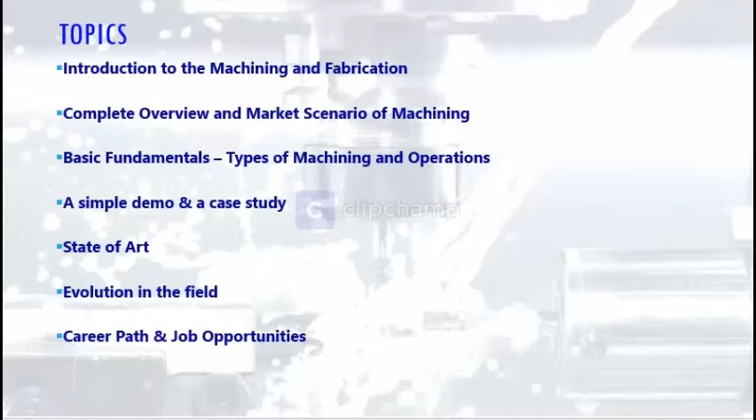This is very useful for everyone, including freshers who have just graduated from college and are willing to pursue a career. Machining would be a fantastic option because it has various roles, such as supply chain, CNC programmer, production, quality engineer, and more. So machining itself is a big opportunity, and it can also be useful for those willing to have a career change, because it's easy to learn, though it needs a skill that's time tested. So for someone willing to change careers and looking into new avenues, machining would be another option.

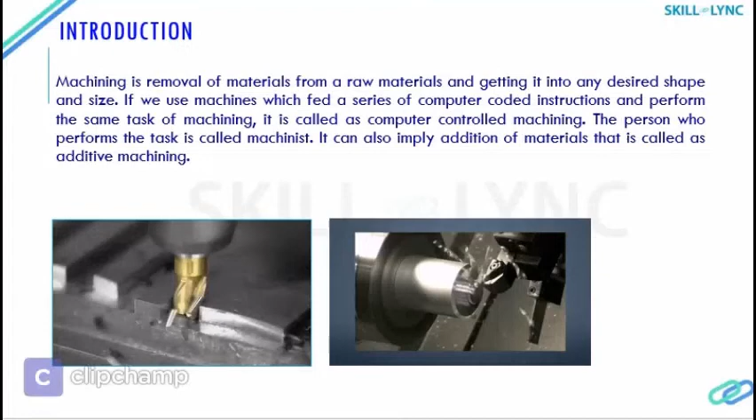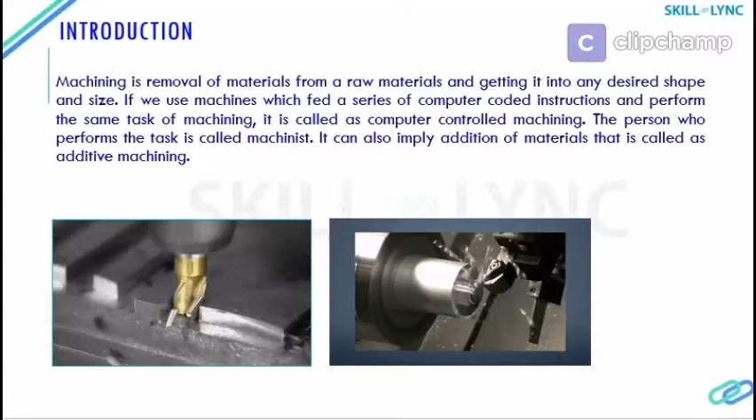And then some people who are industrialists or entrepreneurs can also think about it, because this can be a good startup for them, where they can start with 5 or 6 machines and grow it to the limit they want, like 1000 or 1500. The more machines they implement, the more jobs they can get, and then they can get more revenue out of it. So machining is a term commonly used in manufacturing and industry applications.

But exactly what does the acronym CNC stand for? Do you know? CNC is Computer Numerical Control machine. In the early days, machining started with punching cards to give commands, and now it has changed to various forms, like designing the CAD model, converting the CAD model into a CNC program, and preparing the CNC machine before executing the machining operation.

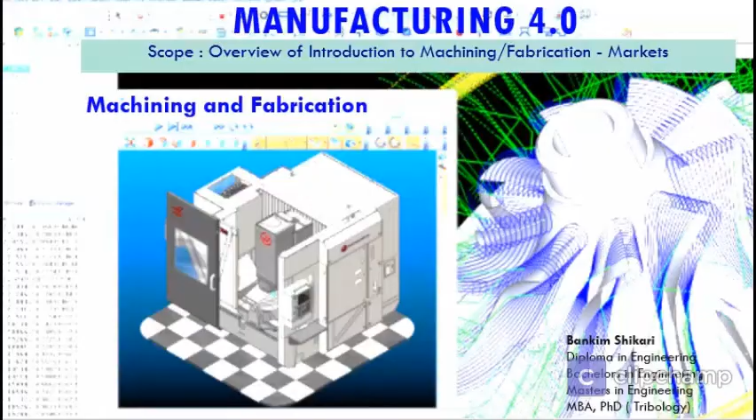So the machining operation looks like a simple thing, but skill is needed when there's a change in the program because of tooling wear and tear, since over time there is always some play and change in tooling behavior. With that, the skilled person needs to understand how much to adjust the machining program so that he can get the nominal value of the product within the tolerance limit.

So it depends on which area to choose and which machining center you wish to open or want to work for. If you use machines which are fed a series of computer coded instructions and perform the same task of machining, it's called CNC machining - computer numerical controlled, or computer controlled machining. The person who performs the task is called a machinist.

It can also imply addition of material, which is called additive machining. If some part is damaged in the industry, like when using some molding tool, and you find that the tool has been used or worn off and is no longer useful, or the tolerances go wide, you can add some additives with the laser and then do the machining again to bring it back to shape. This way, repair and maintenance also takes place in machining.

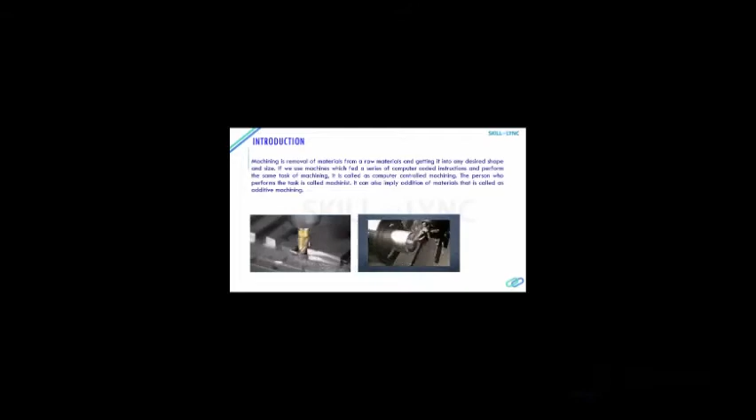So I've given you a little bit of visualization so you can understand that. I think mechanical engineers already did some processing with their lathe machining when using it. But nowadays it's no longer the basic lathes that are used in the industry - all are using CNC lathe machines.

But anyway, before you learn the high level programming, you have to learn the basics, like C or Fortran - similar to how we learn the basics in industry, colleges or university. Then it comes to real machining, where you have to understand in depth machining cut, feed, material type, temperature, pressure, or coolant heat temperature. So those kinds of things come into the picture.

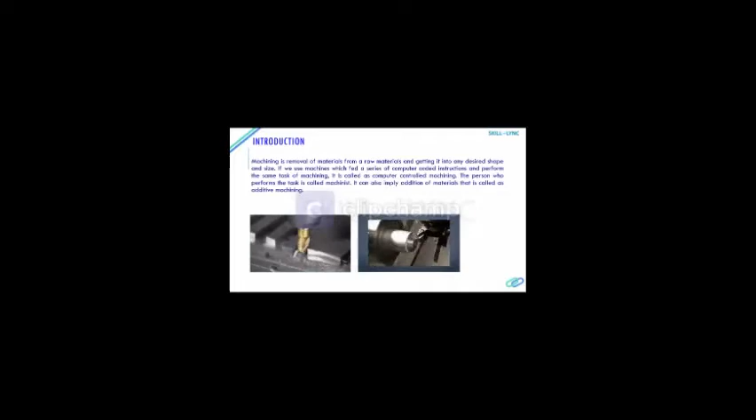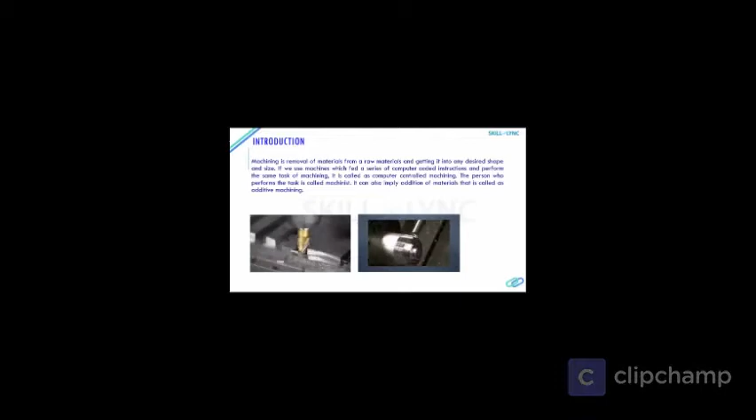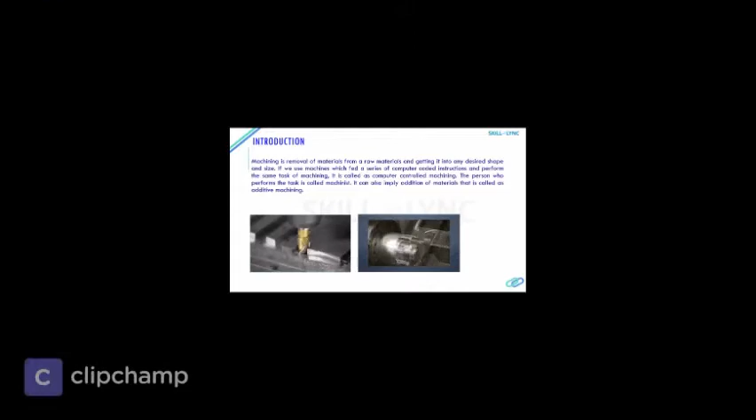So if you see here, there's milling on the left hand side - the tool is cutting a groove inside. On the right hand side there's a lathe machine which is used with a combination of tools - one is turning and another one is making slots onto it.

As I said, this is a very big industry. I'm just talking about figures given by government organization statistics. The overall CNC machining market is expected to reach 100 billion by 2025 - it's about 90 something like that right now. The statistic says 7% growth has been observed from 2019 till now.

And this is the biggest outsourcing job going on nowadays with China, and that's what makes it very difficult for any industry, including the US, to pull out their basic fabrication, because it needs a lot of investment - machines, tools, and the skill set gained over the years. So these are the reasons it's very difficult for people to quickly change their manufacturability from one nation to another. It's strategic, and needs time and time-tested growth, and a bit of investment as well, and of course the skill set behind it.

The overall CNC machining market is expected to reach 100 billion, growing at 7% every year. This is one of the biggest strengths of outsourcing jobs delegated to Asian markets like China, Malaysia, and Thailand, which are all leading in this area.

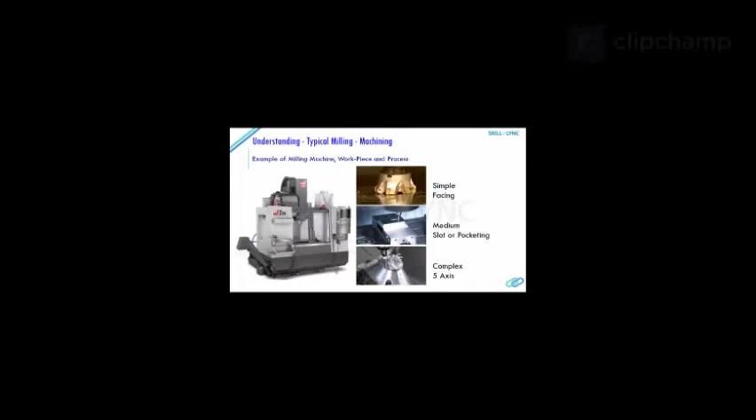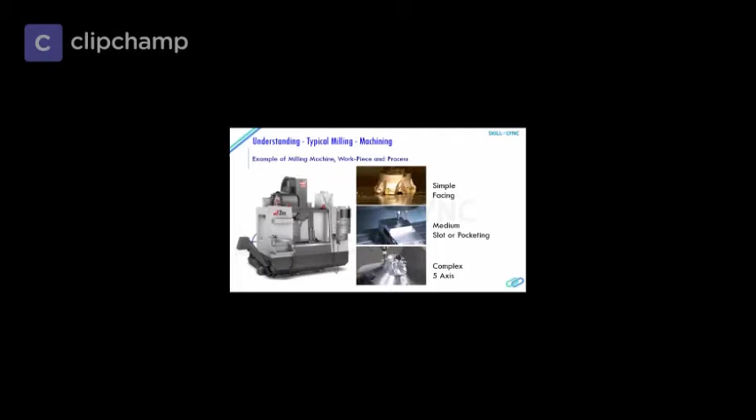Now where the skill comes in is this: because your tool and your machine have play, after some time your tool and machine wear out or have some changes. So with the changing tool, or at certain times during the process, you need to come back and check if there are differences in the part, especially when the parts need to be very precise.

Because if you run it, it might make maybe 500 or 600 pieces fine, but after that you have to come back, because if you don't, the parts may already be damaged, maybe 200 pieces. So you need to keep monitoring that. That's where the skill counts - knowing what needs to be adjusted, and based on the time frame, when you have to replace the tool to minimize scrap and wastage of material.

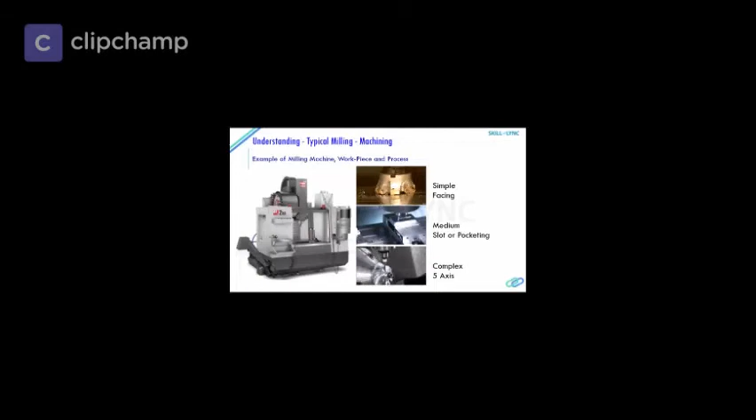So if you see, there's 5-axis complex machining. In this machining, if you see, one axis is the tool cutting up at an angle, another one is the tool itself moving out making a different groove, and the groove is angular as well as doing some facing in it.

5 different axes are used in this one. If you clearly see: 1, 2, 3, 4, 5. So this is how your 5-axis complexity parts are done, and depending on the machining requirement, we go with this.

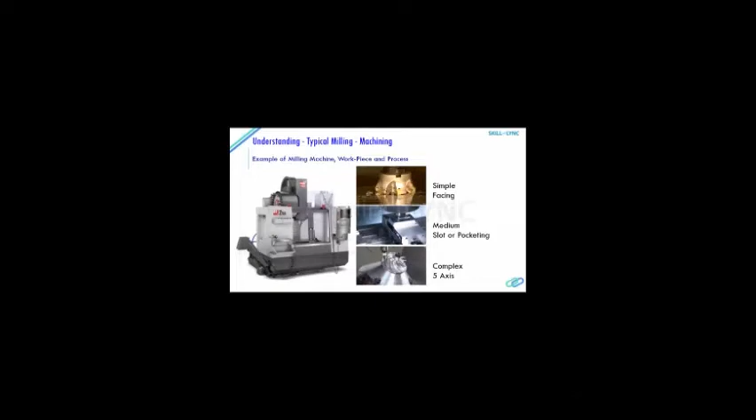So overall, if you see the types of operations we can use - we've already discussed a bit like milling, facing, as you saw in the previous slide. There's also peripheral milling, which is done on the side of the part. The part already comes as a solid material, which is already machined inside, but outside you have to do it. And there's facing operation in milling, pocketing, creating grooves and shells inside the material.

And then there's the turning operation. Turning is done in the lathe, you can use turning, or also in the milling you can do turning, but lathe would be better because, depending on the operation, you have to keep changing the process, thinking through the process.

For example, if you're making a part entirely in the milling machine, and it needs a turning operation, and you're doing it in the milling machine - what will happen is that the milling machine can do the turning, but then in turning, the tool has to go round the part, cutting through all the sides to do that.

What happens is the cycle time will be more. Those things you can do in a lathe machine in very low cycle time, so you can save the cycle time. Why I'm talking about cycle time is that cycle time is a cost, because the more you run the machine, the more it needs the time of the industry. It relates to the cost of electricity, running cost, lubrication, maintenance, and manpower, man hours, everything is included in that.

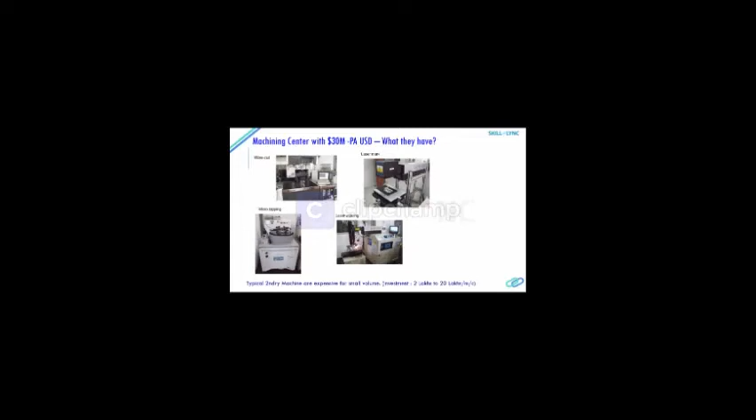Microlapping, or super drill, are very small, fine drills, about 1 to 5 microns, with a very high depth as well. This is used mostly in the medical industry, where you want to pass samples through a small capillary.

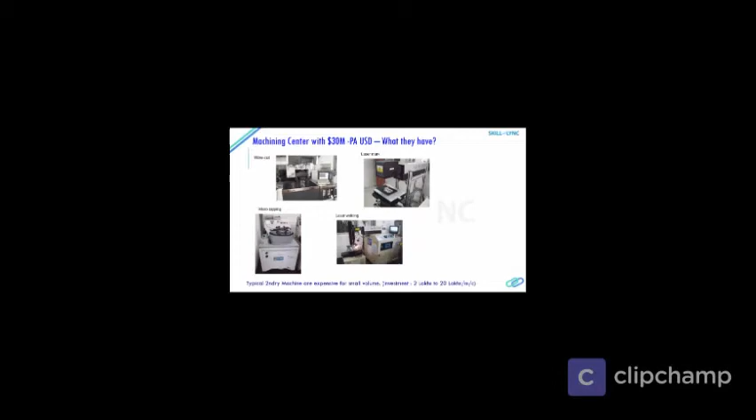Laser welding is also used for high volume of parts, where you want welding. It can also be done on small kinds of parts, where a few components can be welded and used in electronic industries.

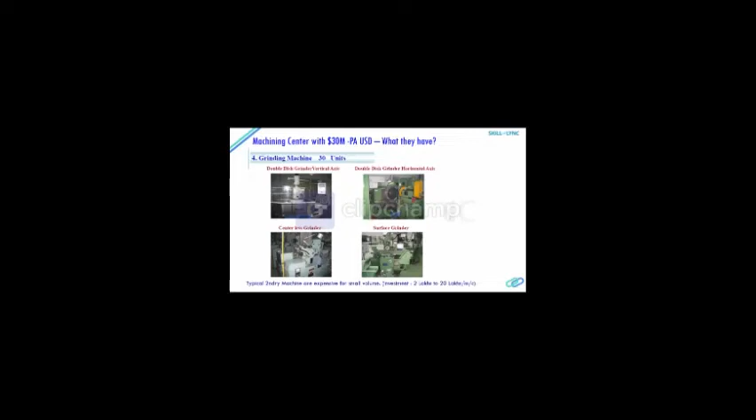Similar to the surface grinder, this one is very common. You can use it in CNC and non-CNC both. The investment amount ranges from 2 lakhs to 20 lakhs.

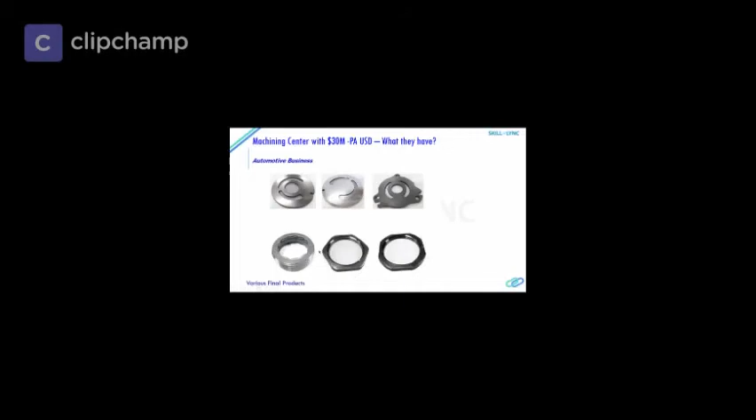Then there's the automotive business, related to the crankshaft, engine body, or two-stroke engines. These are engine cover parts, and they need threading operations. You can do casting, then threading, then barreling or tumbling, and then send it to them.

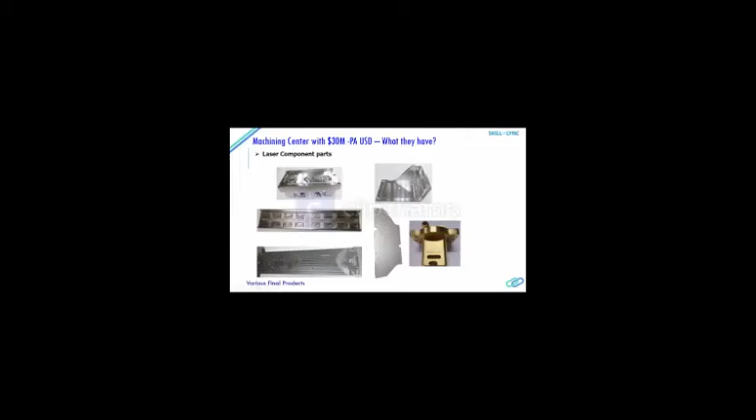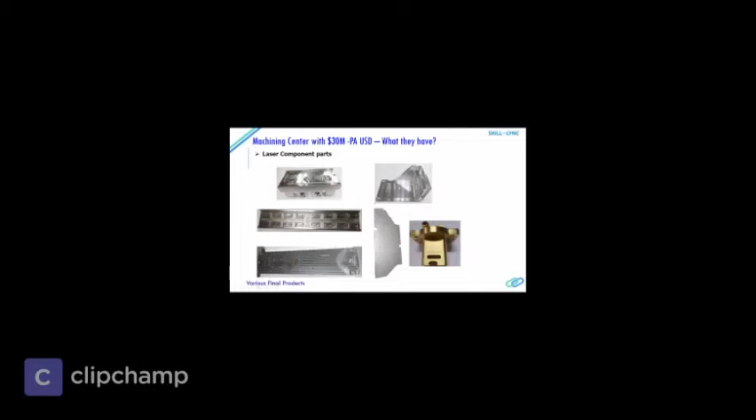Laser component parts are also there. You can use different laser components here, where you can machine the part with different axes, like 5-axis or 6-axis, and create different kinds of channels through it. These are some examples, and then you can assemble the part, get gold plating, and then send the part.

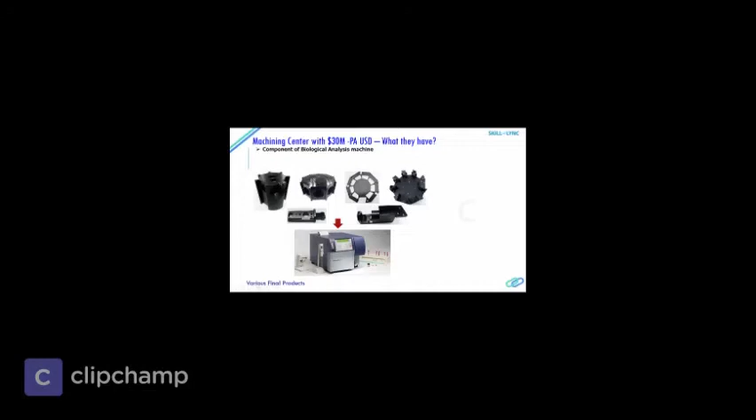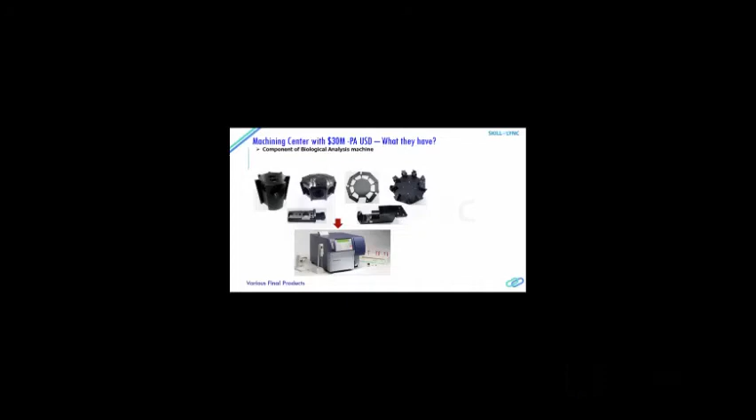Some of the parts used in these materials look black, but they're not metal - it's plastic, about 40% plastic and 60% glass in this one. These are highly precise parts. Sometimes you want to use parts that are very non-reactive - you don't want to use metals there because they may react with the material, so you want something strong but also non-reactive.

Automobile parts - you can see different areas. There are hundreds of automobile parts, like those for 2-tier or 3-tier vehicles. We can use any of them.

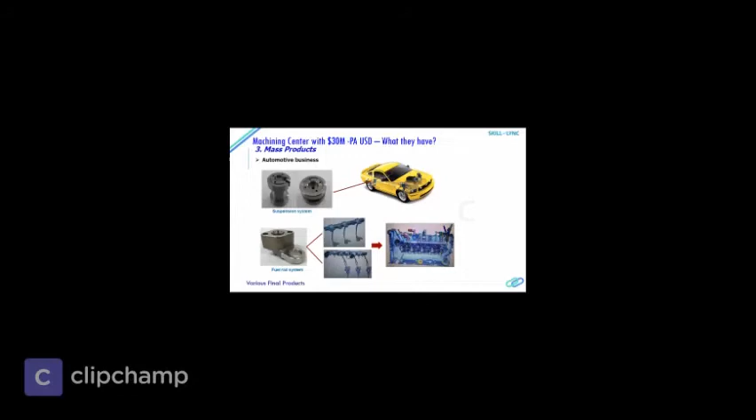Two tiers means you have a supplier like Toyota or Honda. They have a supplier, and those need certification like IATF 16949, but that needs heavy investment. So what we need is someone who can supply to us, because a supplier also needs a secondary supplier. Some suppliers do this: they have a machining industry but are unable to make it more cost effective, so they give it to the secondary supplier. That's called a second tier supplier. Toyota doesn't know the second tier supplier, but the first tier supplier does, and knows they can do it. But because of certification and other requirements, the second tier supplier can't go to Toyota directly and say they want to be their supplier. Toyota or Honda have their own audit requirements that are very complex and very high in standard.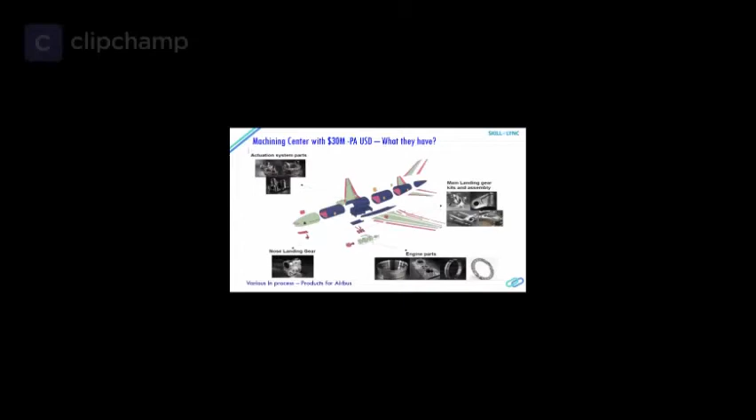Some automation systems and machining parts are in the aerospace and aviation sector. You can see them in nose landing gear, engine parts, main landing gear, kit assembly, actuation systems - machining parts are everywhere. These normally use cold forging, die casting, or aluminum extrusion as a pre-process.

Heat treatment includes hardening and tempering. Heat treatments are given to change the granular structure, give the required hardness to the part, relieve stress, or soften the part - annealing, case hardening, soft nitriding. These are all kinds of heat treatment in machining industries.

Surface treatments include iron plating, zinc plating, chrome plating, gold plating, silver plating, acid aging, hard anodizing, and clear or black anodizing. You see the kind of material that industries are using.

For example, aluminum is very soft and ductile, easy to machine, but steels are very hard and brittle. Some softer materials exist, but harder ones exist too. There are also ceramics - ceramic machining is one of them, very hard and needing a very strong tool. Then there's brass, copper, plastics.

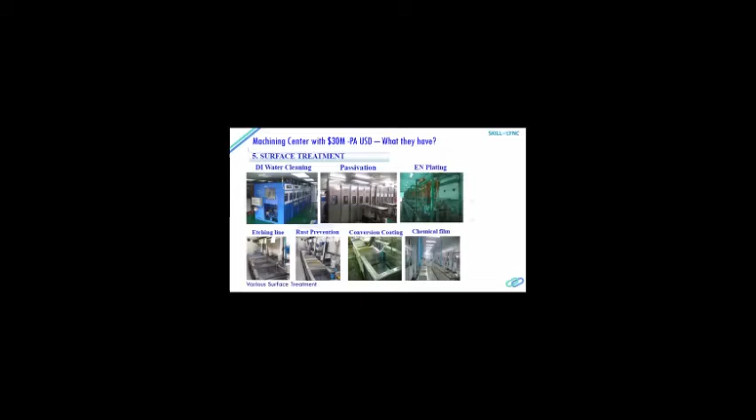Surface treatments such as DI water cleaning, passivation process, electro-nickel plating, etching line, rust prevention, conversion coating, chemical film - these are all kinds of surface treatment normally done with machining parts.

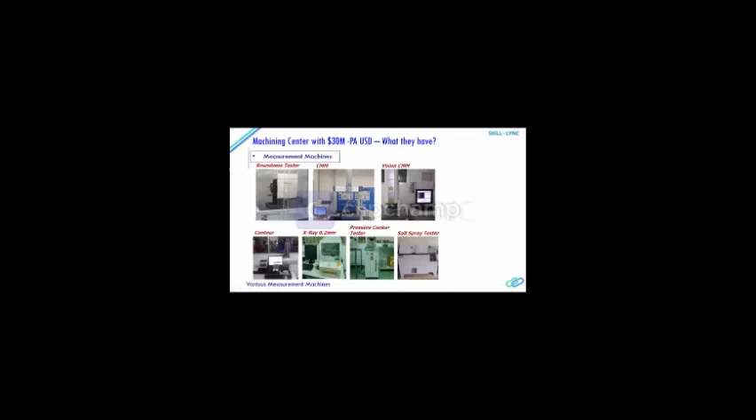I'm running out of time, so I'll do a real quick review. These are roundness tester, CMM, vision CMM, contour, X-ray, pressure cooker tester, salt spray tester - all used for measurement and testing of the part.

Inspection instruments like hardness tester, as I said, then spectrum analysis. You use the material, break it, then use a broad spectrum of light to determine the level of material particles inside or the material presence in that particular specimen. That's what it's called.

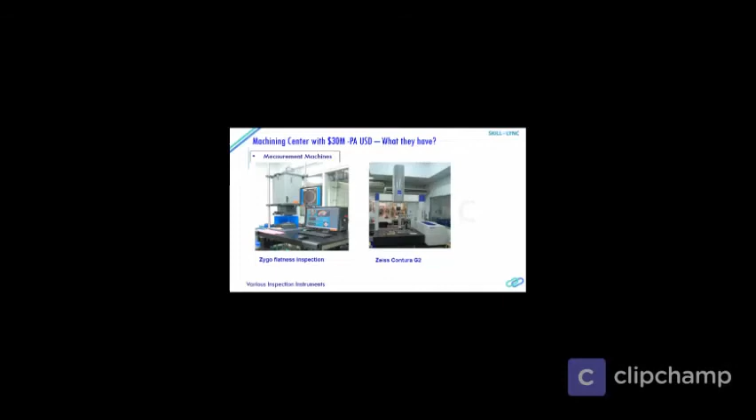Then CMM is there, Zygo is there. Zygo is used to understand the flatness of the part, down to 0.00001 - less than a micron even. Then there's Zeiss Contura CMM.

These are measurement equipment like plug gauge, air gauge, height gauge, thread gauge, dial gauge. We may have read about some of these already, but these are all customized as per the requirement in the industry.

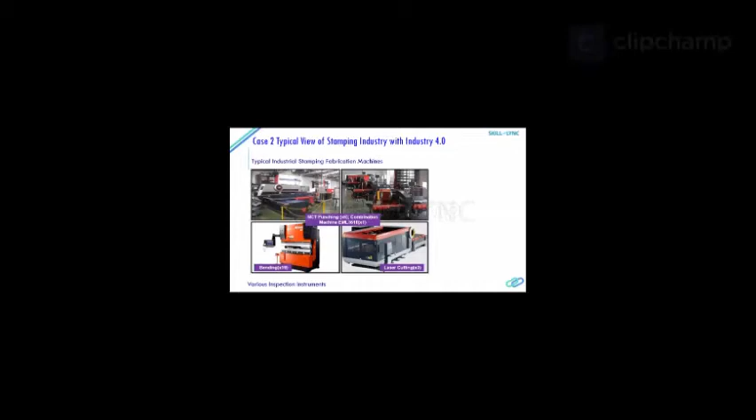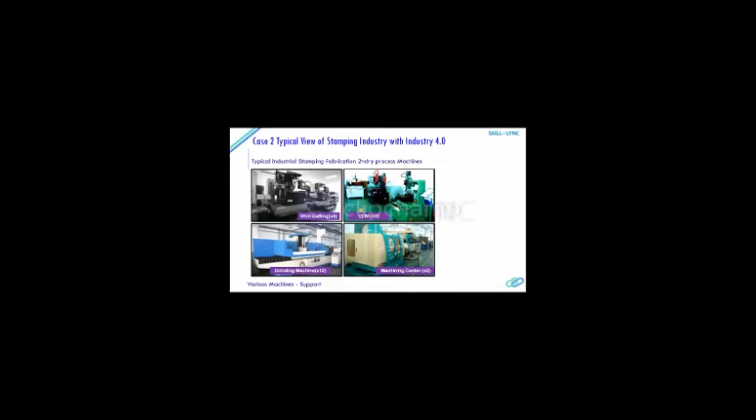Case two is the stamping industry, where we use punching, bending, laser cutting. We have wire cutting machines, EDMs, grinding machines, and machining centers. These are all used in stamping machines, which normally vary from 25 to 200 tons.

Then there's laser, like YAG laser, used with robotics. This is like the Industry 4.0 concept, where industries nowadays operate based on remote control.

Example: you have low cost countries like Cambodia and Vietnam. You want to install some sort of machining house, and then control it from US, China, or somewhere in India. You can see them working, and experts can virtually go there with the virtual glass and fix the part. They can see the maintenance actions or something they need to suggest at real time at the place. This is actually happening here.

All the data is loaded on the cloud, so the customer has the right data and direct access to the data they wish to have, and people can do remote control and expert help with VR, easy fault determination, remote manufacturing, use of AGVs. All this could be done with the Industry 4.0 concept.

Some of the basic certifications that have been done with the machining industries include ISO 9001, ISO 14001, ISO 16949, etc.